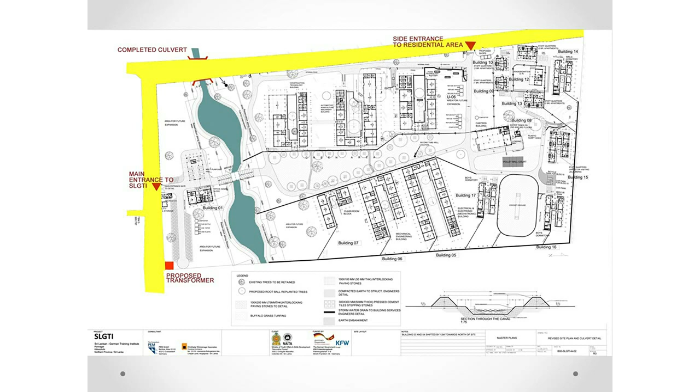We did a vocational school in Kilinochchi called SLGTI, Sri Lanka German Training Institute, on a 15-acre land. In the first one-third of the land there is a seasonal canal occurring, so we have zoned the buildings into three categories: the first one-third has the admin buildings, the second one-third has the vocational education buildings, and the third one-third has residential hostel facilities.

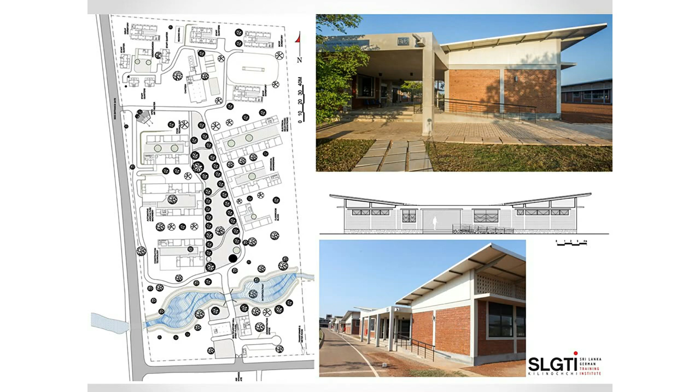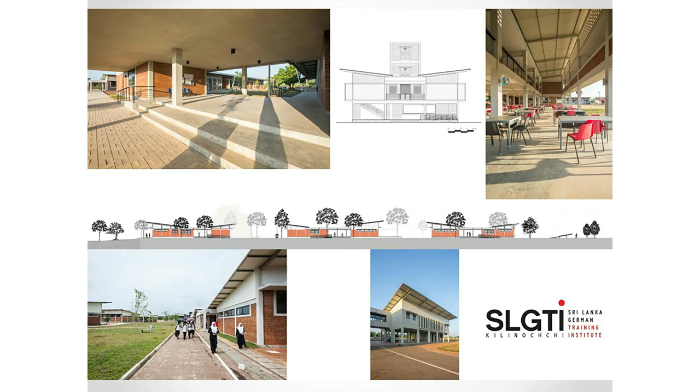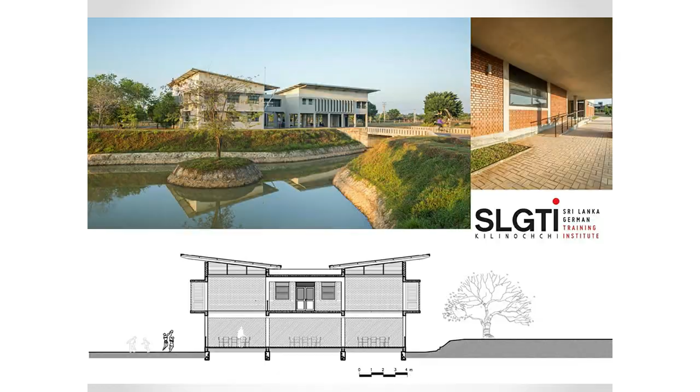The buildings on site are arranged into three zones, and the canal occurs in the first one-third. The 15-acre site is zoned into admin, vocational, and residential zones. Vocational buildings are arranged around a central green area, encouraging student interaction. An enlarged canal forms the foreground to the admin buildings. Vocational departments are laid out in a U-shape with an open-ended courtyard in the middle, encouraging cross-ventilation and through-drafts.

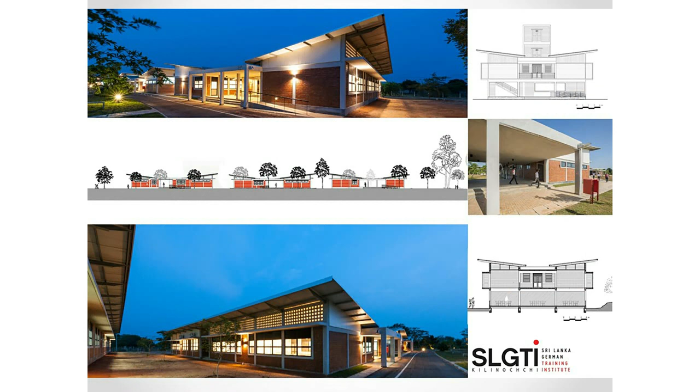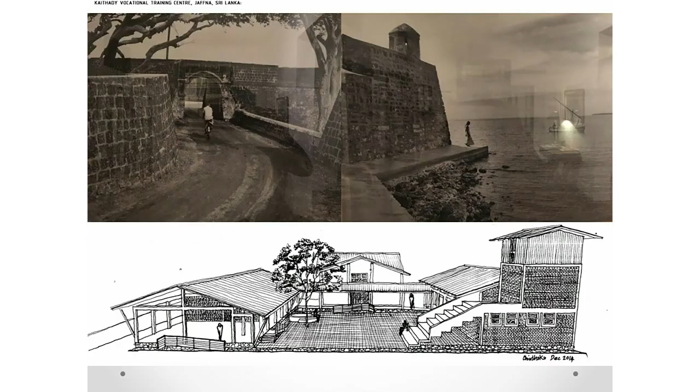Next project, again under the same initiative, vocational training in the north: we did another vocational training school in Jaffna, Kaithady Jaffna, and we drew inspiration from the Jaffna fort when we visited for the first time. After the war ended in 2009, I visited Jaffna in 2012, and the first thing which struck me was the Jaffna fort, the graying coral stones of it, and we selected cement bricks for the vocational center as an inspiration from the Jaffna fort. Here too we created an open-ended courtyard overlooking a lagoon.

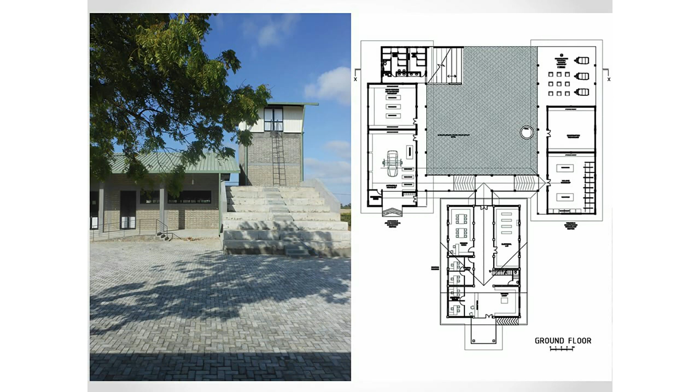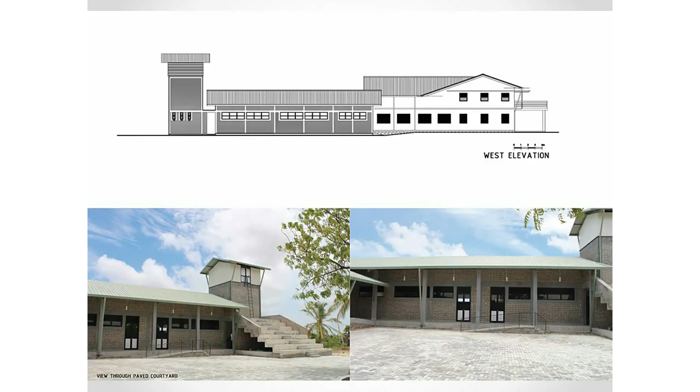There's a lagoon near the existing school. There was an existing two-story building, and we wrapped two other single-story buildings around it, creating a paved courtyard in an open-ended U-shape in the middle, so that students used the paved courtyard as a gathering and communal area.

There was an existing well in the courtyard area, and it was retained, as well as a margosa tree which was existing, retained to give shade to the building. We added an open-to-sky, tiered, stepped open-air theatre for student meetings, which can be roofed by a lean-to roof later on.

Our budget did not allow us to put a roof on the open-air theatre area, so we created it as an open-air theatre that can later be covered by a lean-to roof.

A corridor around the paved courtyard links the various vocational training departments of the school. The texture and tactile quality of the cement bricks used evoke memories of the graying coral stones of Jaffna Fort.

Students use the stepped tiers in the morning for their early morning meetings when the sun is not that hot in the Jaffna Peninsula. We hope that one day a roof will be constructed with additional funding. The cement bricks give a certain monochromatic black and white quality to the buildings.

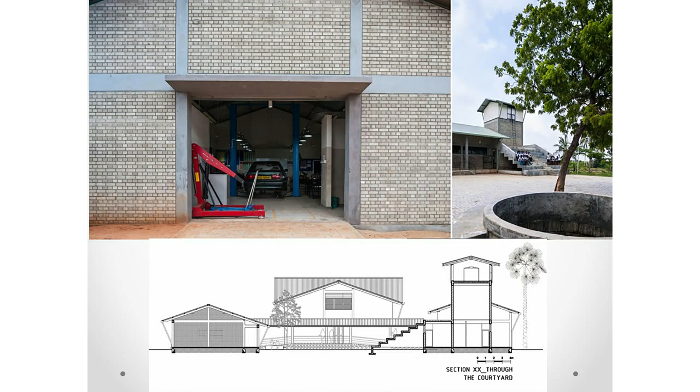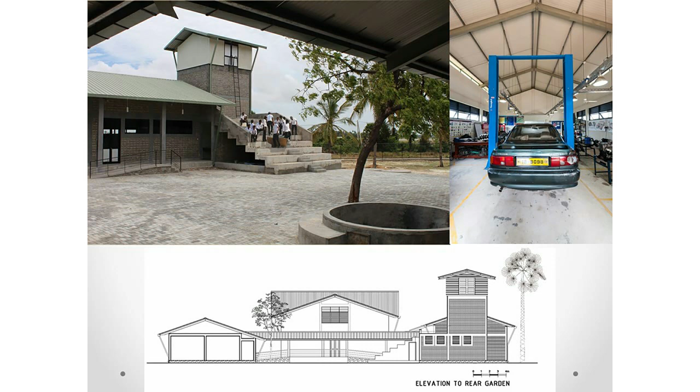The central courtyard acts as a central gathering place for students and a play area. The saved margosa tree provides shade in the hot Jaffna Peninsula. Departments include the automobile technology department, the three-wheeler mechanic department, and the AC mechanic department.

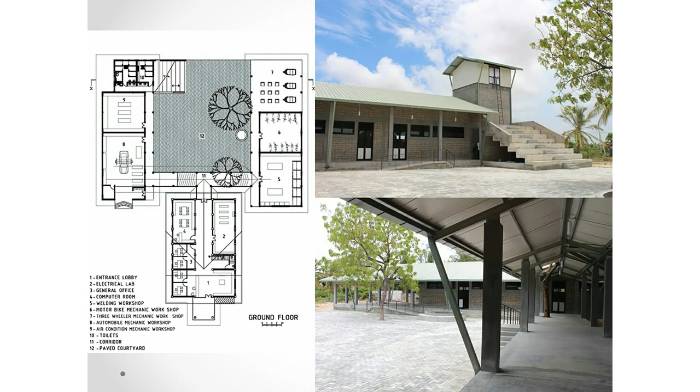We have used sandwich panel roofing as the roof cover, and the corridor around the central courtyard was created to induce cross ventilation and through-drafts. The play of light and shade on the cement brick gives character to the buildings.

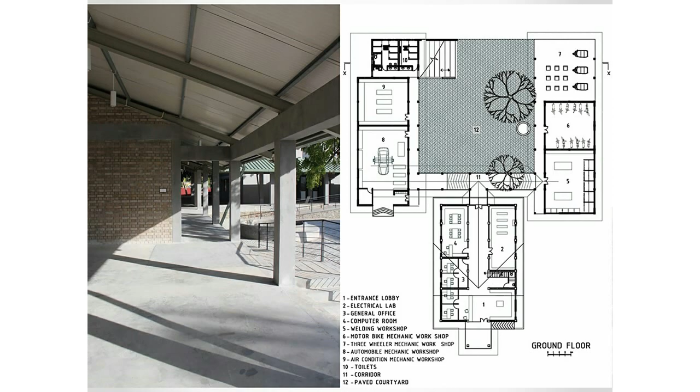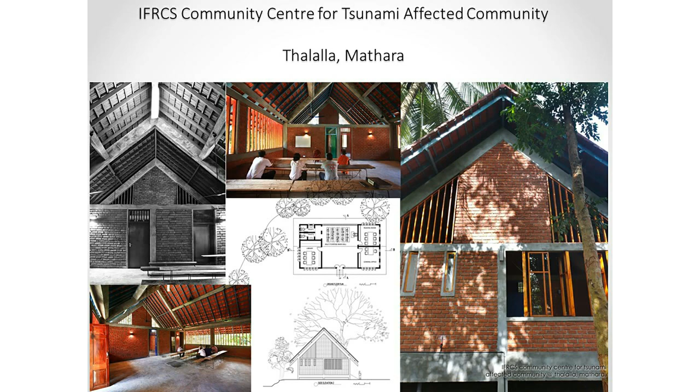The next project I'm going to talk about is a post-tsunami construction. It's a community center in Thalalla, Mathara, donated by the International Federation of Red Cross and Crescent Societies. Here we have used exposed clay bricks again to economize the building cost, to reduce the cost of plaster and paint, because we worked with a $50,000, 6.5 million rupee budget.

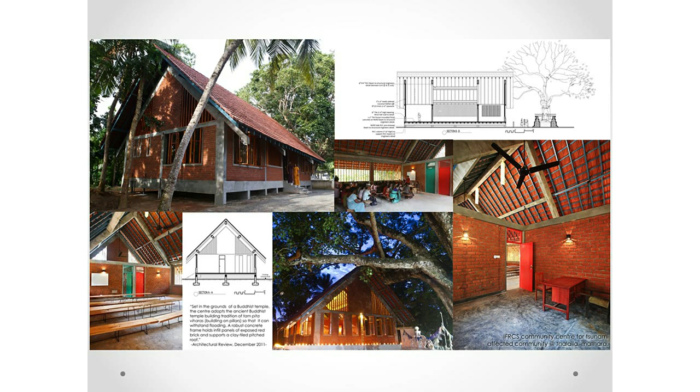The building was raised above ground to prevent flooding and let water pass through to the nearby paddy field.

The common hall in the center is a double height area with a provision for an additional mezzanine floor, and a reading room, office and toilets are in the four corners.

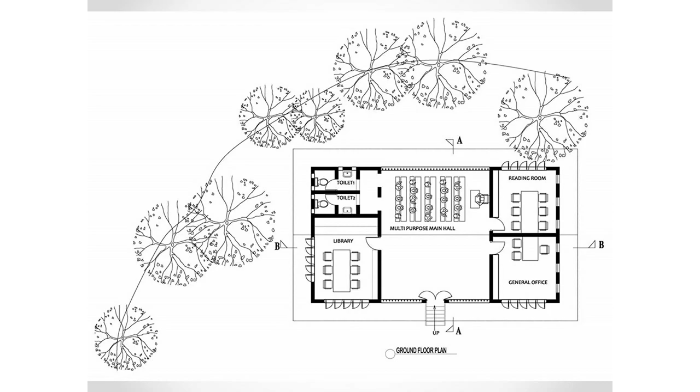The community uses the community hall for their Samurdhi meetings, cooperative meetings, and on Poya days this becomes a preaching hall for the temple monks. They use it as a preaching hall.

So it's a kind of multi-purpose central double height hall that we have created in the middle. The double height also enables a timber deck mezzanine floor to be added at a later stage, because the chief monk of the temple was keen on a second floor.

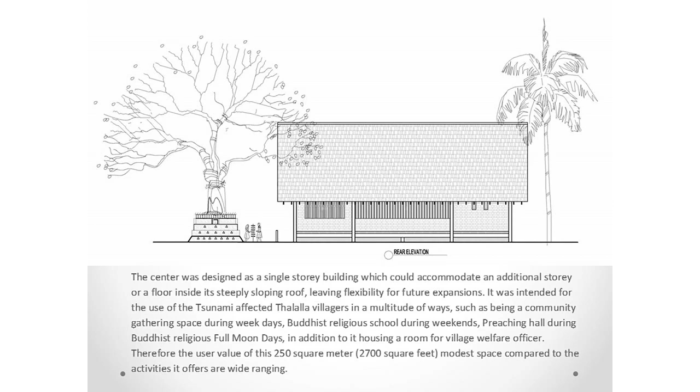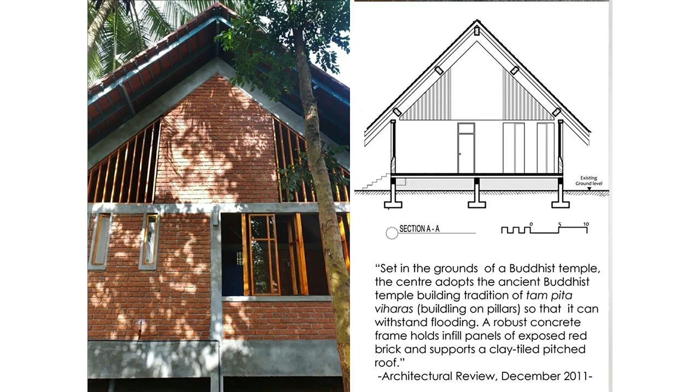We have used frameless pivoted windows again to economize the cost of the building. Here is the community of Thalalla village using the center. The center is constructed next to the bo tree of the temple, and there is an office used by the Grama Sevaka, the village welfare officer.

Next, I'm going to talk about a few residential projects.

First is a 6-perch land on a sloping site overlooking a paddy field. I was asked to design a house for a doctor couple in Thalapathpitiya, overlooking a beautiful paddy field, with the site sloping towards the paddy field. So we had to use the section in an economical way, with a 15 feet high living room and a 15 feet high master bedroom overlooking the paddy field on the upper floor.

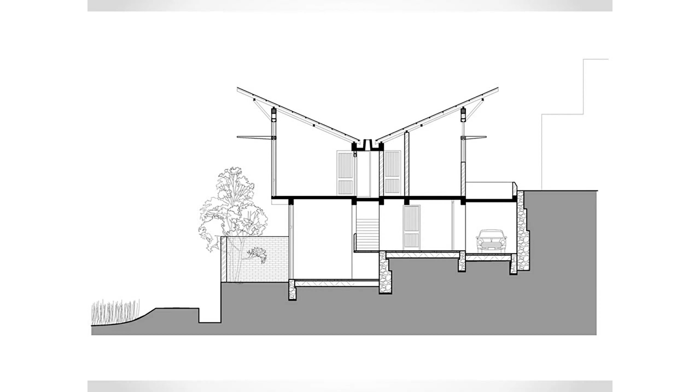And we created what you call a butterfly roof, with a central slab area acting as a gutter to drain water. The living room and master bedroom are on the paddy field side with a lot of glazing and windows, and the car porch garage is at the back at a higher elevation.

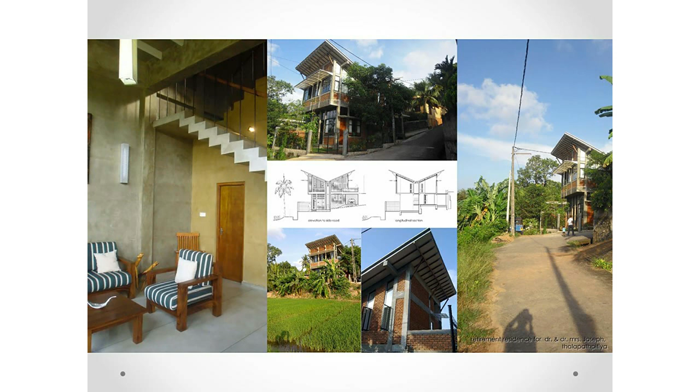The house follows the existing site contours. Multiple glazed windows on the paddy field side are used so that people using the living room and master bedroom can overlook the paddy field, and it changes during different seasons as well.

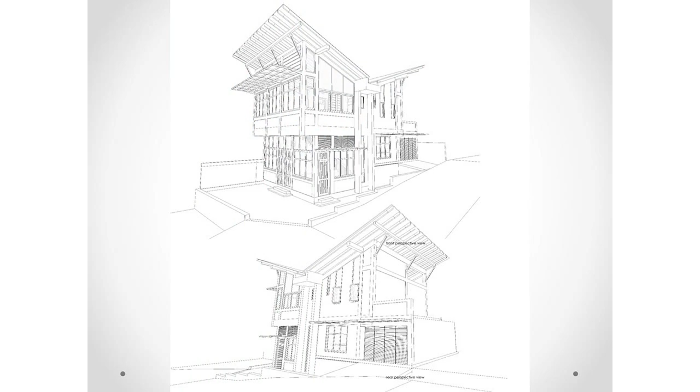Again, here we have used exposed grey bricks due to budget constraints. Extended eaves protect the exposed brickwork from the elements. We have used aluminium frame glazed windows again to save cost, without using timber windows, due to budget constraints.

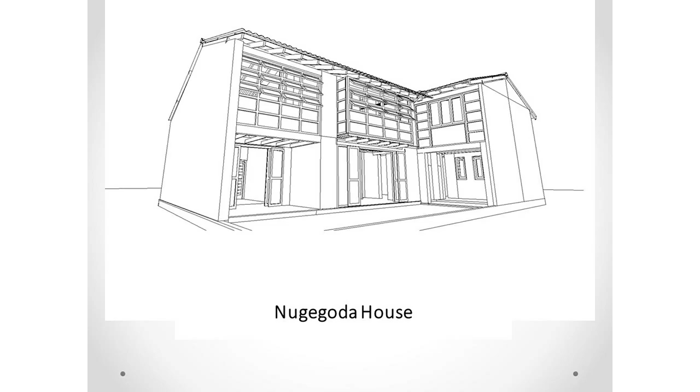The next project we're talking about is the extension to an ancestral home, using the same roof height as the old house and creating a double height, then creating different volumes inside the spaces created within. This is the double height overlooked by the upper floor TV room and living area, and the dining area and upper floor TV room overlook a rear garden with more glazing onto the rear garden area.

First floor TV room, we have used it as a timber deck and a veranda overlooking the rear garden, with more glazing onto the rear garden with multiple sash glazed windows.

There is a front veranda with the height broken by a recycled timber panel, so it's a double height veranda. We have tried to break the scale by using recycled timber windows.

This is the upper floor TV room family living area overlooking the rear garden, and you can see there's a cement grill brick wall we have used to give privacy to the rear garden because there are houses on the other side.

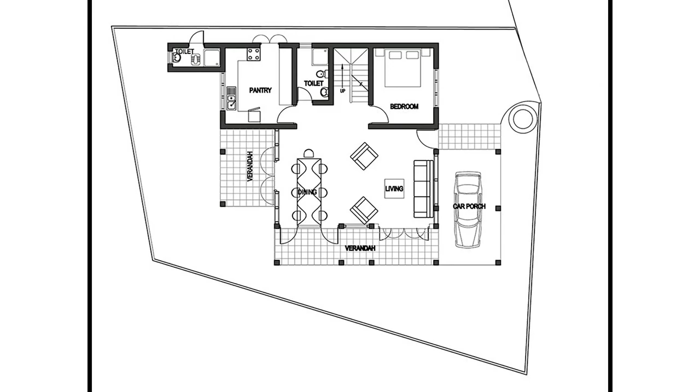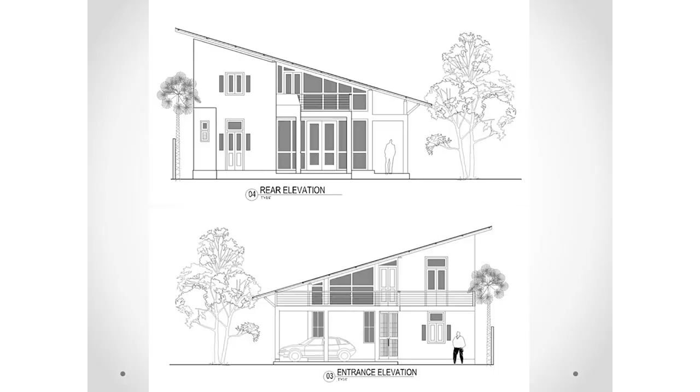And the front elevation gives a simple mono-pitched lean-to roof look to the house. These are the elevations: the front elevation, entrance side elevation, and the rear elevation. So we tried to do a very simple extension to the existing two-story old house.

This is the double height area, living dining area of the house, overlooking the marshes. Another view of the living dining area, and this is the double height veranda towards the marsh, Diyawanna marsh.

And also we have single height verandas as well, enveloping the living area on the rear side. Another view of the double height veranda and the double height living room.

And we have a timber deck on the upper floor as a small extension. It's a family living area overlooking the living dining area in the ground floor, linking the house spatially and voluminously.

The house glows like a lantern in the night, using the glazing on the marsh side.

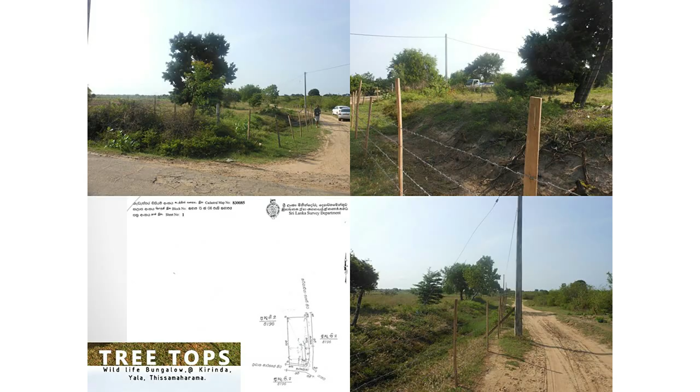Then the final project I am going to present is a wildlife bungalow near Yala, 7 kilometers close to Yala, overlooking a paddy field and a sanctuary called Nimalava Sanctuary.

This is the first view when we visited the site. It had a side road and a main road, and vast expanses of paddy fields and scrub jungle on the other side of the side road.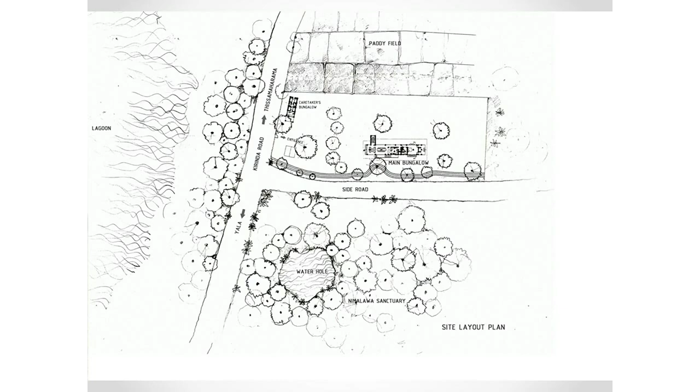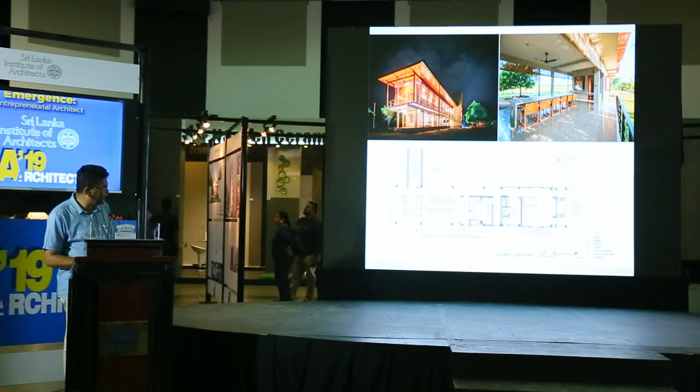Kitchen pantry, and in the ground floor for elderly visitors there is a double bed bedroom with a toilet.

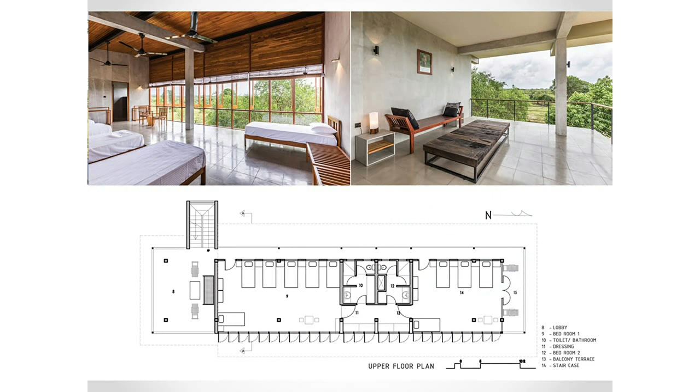And the upper floor consists of two multiple bed dormitory style bedrooms with a common toilet, so it can even be used as a male and female separation. And the veranda overlooks a seasonal water hole next to Nimalawa Sanctuary.

On the Nimalawa Sanctuary side, we have used lots of timber frame glazed multiple sash windows, while on the corridor side there is timber trellis work to give privacy to the users.

This is the view from the Nimalawa Sanctuary side, with the multiple sash windows overlooking the sanctuary and the timber paneling on top.

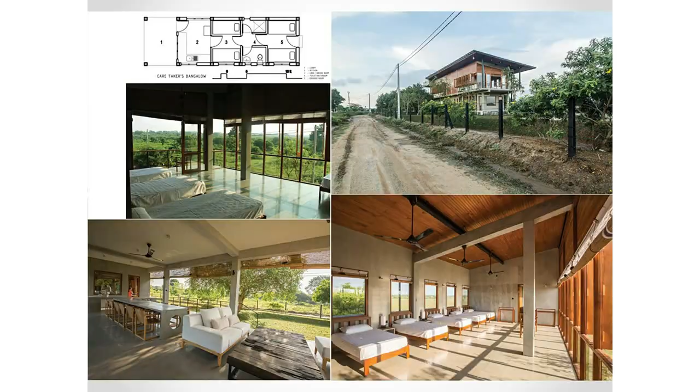We have created a small embankment on the side road side to prevent flooding, as during the rainy season a lot of water gushes through the side road.

And you can see the view towards the Nimalawa Sanctuary using multiple sashed glazed windows. And the next image is the ground floor triple bedroom overlooking the paddy fields.

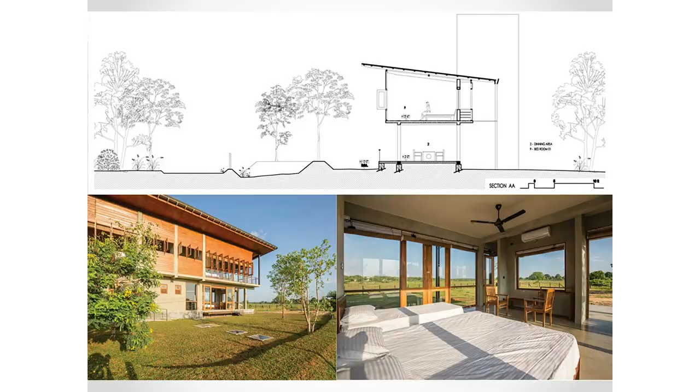These are some other views on the Nimalawa Sanctuary side, and a view from the Nimalawa Sanctuary looking towards the building and the ground floor bedroom overlooking the sanctuary.

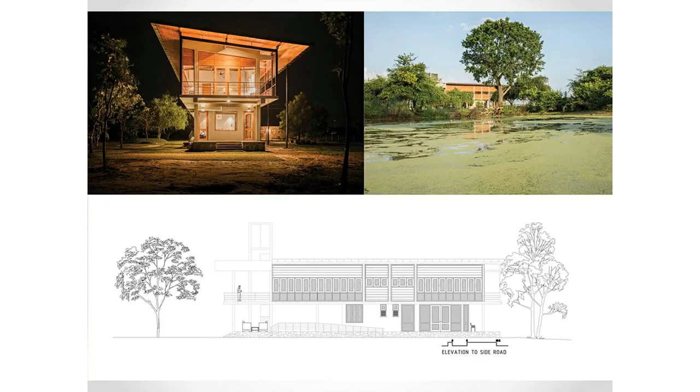One view from the seasonal waterholes, sometimes even wild elephants inhabit this waterhole during the dry season.